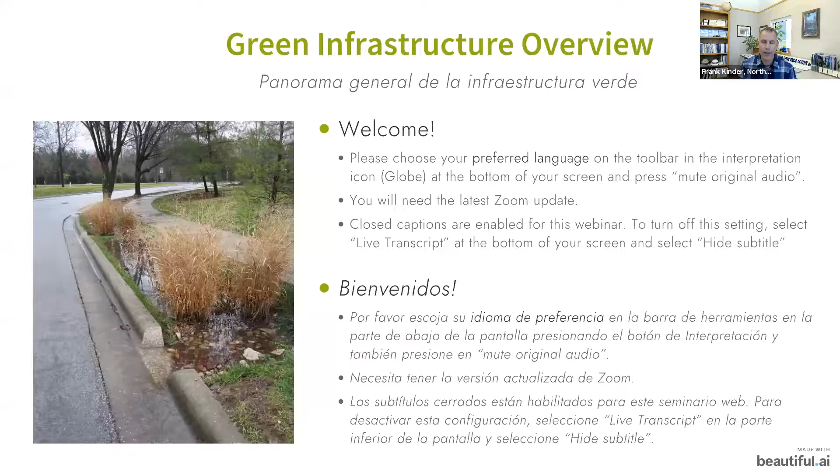Some of that water is shipped over to the eastern slope here, stored in large reservoirs known as Horsetooth and Pinewood and Carter and Boulder, and then delivered to all of these cities. As we receive precipitation on the eastern slope, we seek to manage that so that we can get good quality and deliver that water downstream.

As the supplemental water provider in the region, we have an obligation to help people understand and appreciate the scarcity of water and then what it takes to deliver it, as well as how to take care of it and to treat it with respect. And we're doing that with you today here.

The other thing we do is work with these communities who have stormwater management to transition some of the high water use landscapes in detention basins into lower water use landscapes while retaining their existing performance. So that basin that you see there on the right is using Kentucky bluegrass. It's irrigated and it's taken care of through mowing and chemical treatments. It's possible that this could be transitioned into a native turf, which would still perform the same quality requirements at the end of the day with a little bit less input from natural resources.

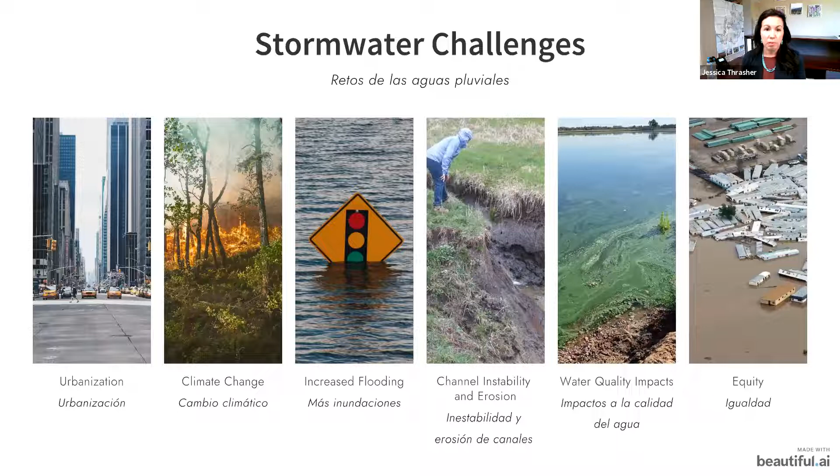To start, let's discuss the stormwater challenges we're seeing in our environment. The first is urbanization. With urbanization, we see the removal of green space. As our cities expand, we are paving over areas that were previously vegetated, and because of that we're getting decreased infiltration, which results in increases in stormwater runoff.

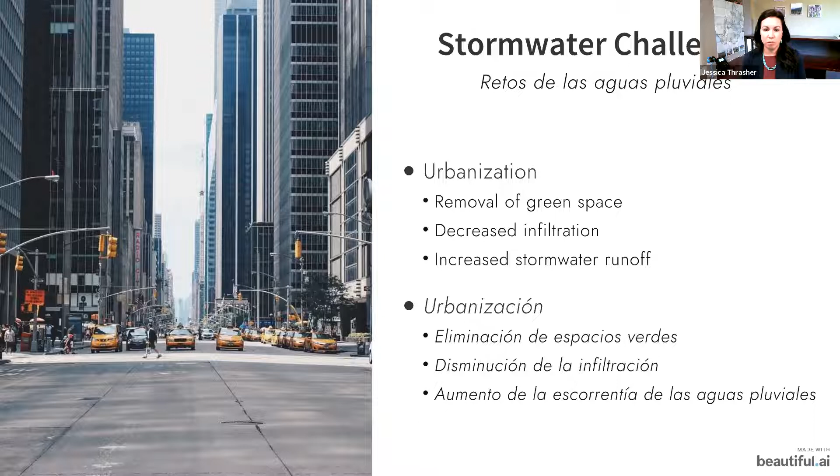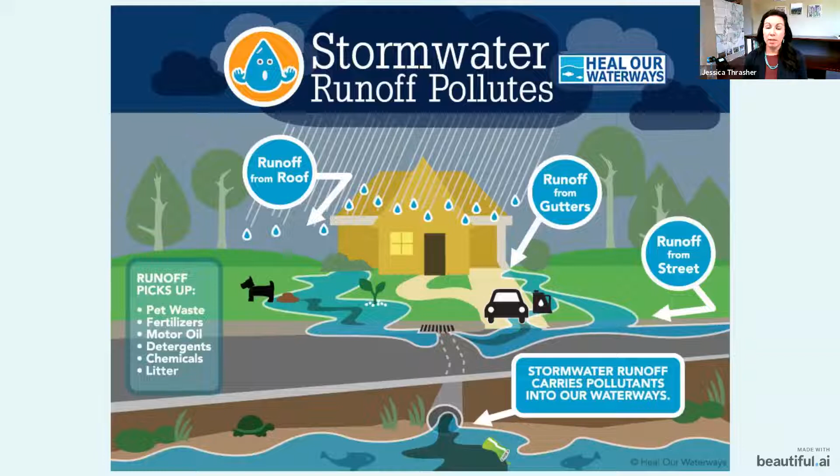We need to address stormwater partly because of the pollutants it picks up. As rain hits your roof and runs down into downspouts, across pavements, driveways, and parking lots, it picks up pet waste. Fertilizer is a huge issue as people fertilize their lawns. Frank mentioned a way we can decrease that need for fertilization by transitioning to native grasses. Motor oil is also picked up in stormwater, along with detergents and chemicals, and all of this is deposited into our waterways unless it is first cleaned by a stormwater control measure.

In addition to urbanization, we also have climate change as one of the challenges with stormwater. With our droughts, we're seeing drought as more of the norm instead of the exception. This impacts our forests, because our forests are drier. And when we have fires like we saw last year, it's a hotter wildfire and it lasts a lot longer, because the trees aren't able to withstand the normal fires they had previously.

There are a lot of impacts on water quality with fires. If you want detailed information about this, I encourage you to check out the Stormwater Symposium. When a wildfire burns extremely hot, it makes the soils hydrophobic. They're no longer able to accept that runoff or moisture. So when the snow melts, that water runs off of those soils in burn areas, picking up sediment and debris, and deposits it into our rivers.

This becomes a major issue on a lot of different levels, but just at the municipal level, Northern Water has been doing a lot of work on this. If there's a certain amount of sediment and pollutants in the rivers, it's very difficult for water providers to remove those sediments because it creates difficulties in their system. So the city of Greeley actually had to let water flow down the Poudre River this year and not remove it, because it had too much contaminants from those burn areas. This is a substantial impact on our water.

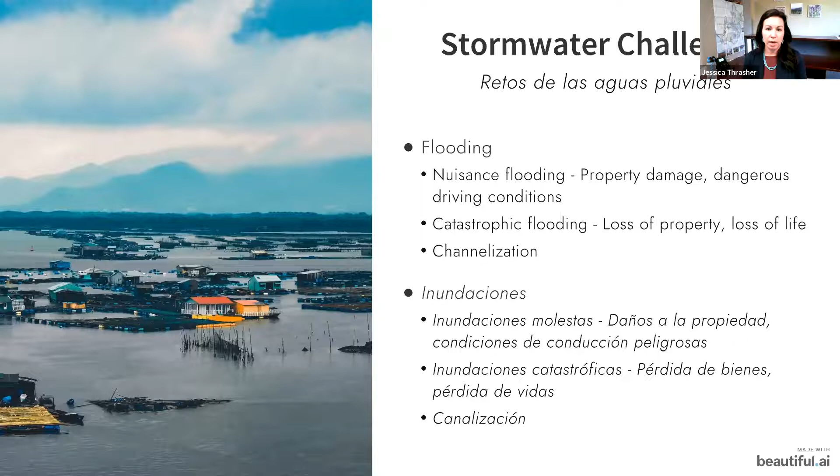Channel instability and erosion is an issue because as stormwater flows across a vegetated surface, that water infiltrates into the vegetation. When it does that, the pollutants in the water are removed and trapped in that soil profile, and as that water goes down into the groundwater, it is cleaner. When you have channelization and water cuts a path through that vegetation, those contaminants are released into the water once again, and you have the additional component of sediment also being added to the water.

When we have fertilizer and other contaminants reach our reservoirs and bodies of water, we have the potential for algal blooms, which cause hazards to human, pet, and aquatic health.

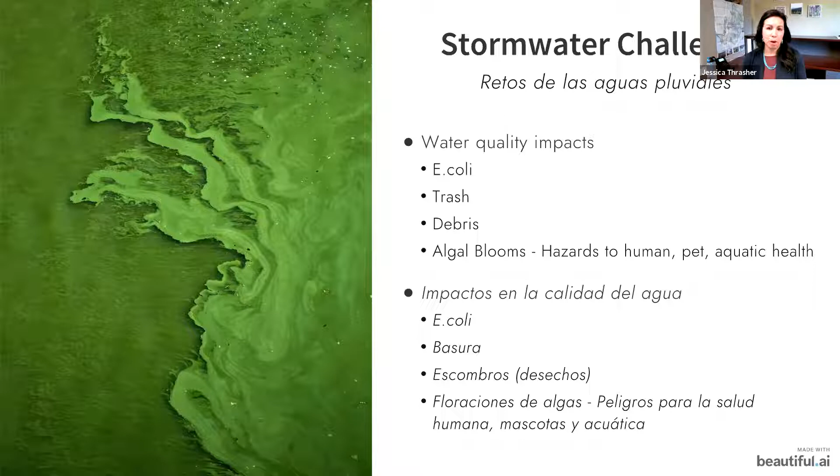And finally, along with the stormwater challenges, as we have these climatic changes, with increases in drought and increases in flooding, those challenges are impacting our vulnerable populations the most. So one of the challenges we're seeing right now is around equity. As we make adjustments to our stormwater infrastructure moving forward, we need to ensure that vulnerable populations, especially in low-income areas, are brought into the conversation so that we can have sustainable infrastructure moving forward.

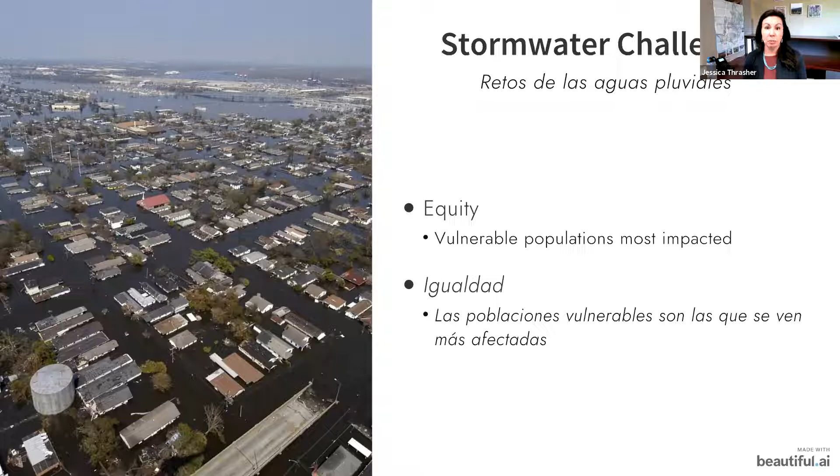Okay, now I'm going to start talking about the different types of stormwater control measures. Extended detention basins are only part of one of the different types. So we'll go into what those different types are and then focus in on extended detention basins.

The Mile High Flood District, which was previously the Urban Drainage and Flood Control District, created this 4-step process for stormwater management. Step 1 is to reduce runoff, which can be achieved by LID, low impact development, or MDCIA, minimizing directly connected impervious area. Directly connected impervious area is when your roof connects to an aluminum or steel downspout, to your concrete sidewalk or driveway, to your concrete curb and gutter system, to your concrete or metal piping—where nothing is able to infiltrate. So by reducing the directly connected impervious area, you're allowing more opportunities for that water to infiltrate. That's step 1.

Step 2 is to treat and slowly release the water quality capture volume, or WQCV. Number 3 is source controls. For example, fertilizers are hard to remove once they're causing algae growth in bodies of water, so sometimes the best approach is educating homeowners to stop using so much fertilizer, because it's hard to remove once it's in the water. We're not going to talk about step 4, which is stabilizing the stream channel, but that is another step for stormwater management.

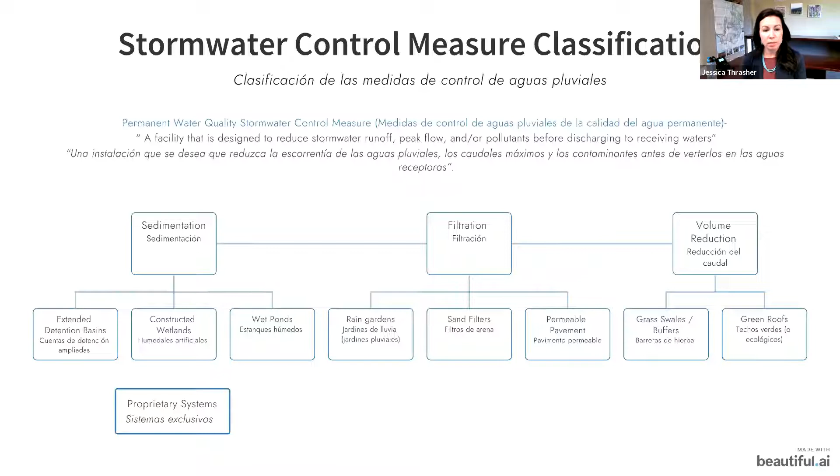There are three different classifications that we talk about with stormwater control measures. The first is sedimentation, which includes extended detention basins, constructed wetlands, and wet ponds. The next classification is filtration stormwater control measures, which include rain gardens, sand filters, and permeable pavement. The final classification is volume reduction, which includes grass swales, grass buffers, or green roofs. Proprietary systems are underground systems, and they're their own special classification.

So we're not talking about naturally occurring wetlands here. Those cannot or should not be used for stormwater management—that's a very bad idea. These constructed wetlands, also you cannot use mitigation wetlands as stormwater control measures for the same reasons. So constructed wetlands are a specific type of stormwater control measure used for that purpose, but they have the additional benefit of providing many of the same benefits as a natural wetland.

And similar to constructed wetlands, wet ponds and retention ponds are also a sedimentation SCM example.

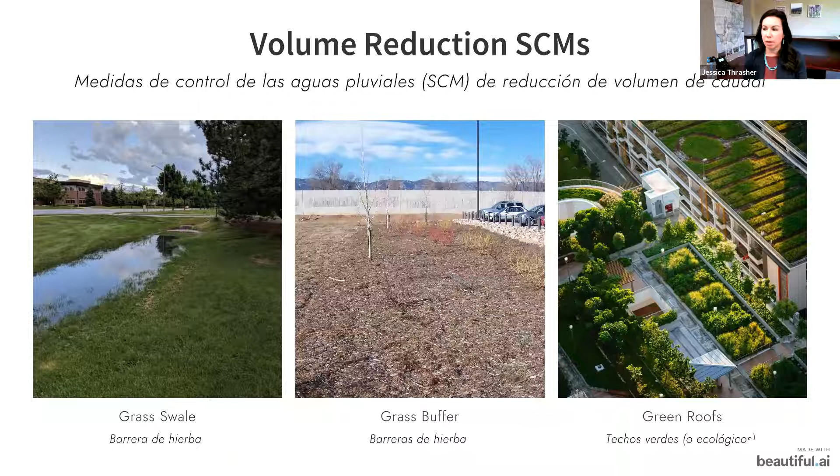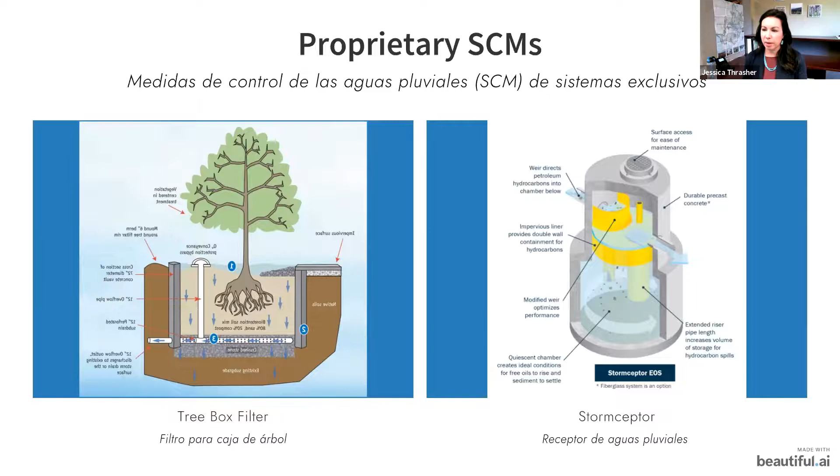Stormwater control measures are required by the Clean Water Act, especially for municipal separate storm sewer systems, or MS4 permits. When those are issued, they're regulated by the Colorado Department of Public Health and Environment, or CDPHE. As part of this permit, you are required to maintain the stormwater control measures to ensure long-term sustainability or operability of them. There are audits conducted by the CDPHE or EPA to ensure they are being maintained and operating correctly.

Why is maintenance needed? Maintenance is needed on stormwater control measures because they are designed to capture and slowly release stormwater. As that happens, particulates are dropping out of the water—that's their function. And when that happens, if you don't clean them out regularly, then they're contributing to more pollution downstream. If you have a clogged outlet structure, which we'll be talking about in a lot of detail later, they can result in standing water because the water cannot get out through the outlet, or water bypassing the stormwater control measure and being released inappropriately.

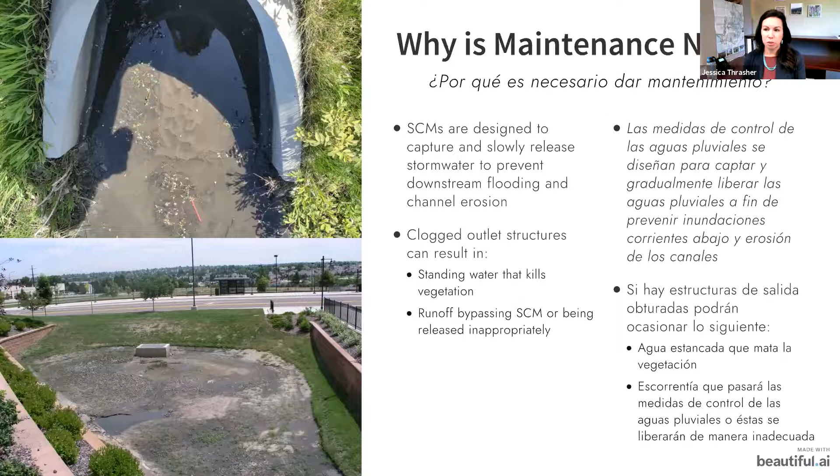As I was saying, they're designed to remove trash, debris, and pollutants from the water. And if they are not maintained, then they add more pollutants than they remove. That is not the goal of stormwater control measures.

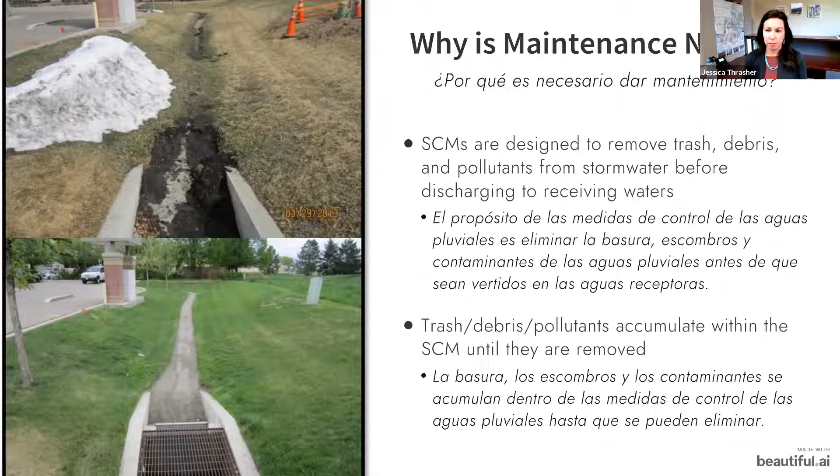As you can see here, this one has not been maintained correctly. The water that comes in is relatively clean, but the water that goes out is dirtier than it was when it entered the stormwater control measure. It's not performing as it should because it's clogged. Especially if these stormwater control measures are in HOA areas or areas that benefit the community, this becomes unsightly and unattractive, and it's not something people want to be around.

Stormwater control measures are not being maintained, usually because it's believed to be too expensive. The owners don't know that they're responsible for the maintenance, or they don't know that they actually have this stormwater control measure on their property. They don't know it's theirs and that they are responsible for that maintenance and inspection.

Potentially it's because the inspections aren't frequent enough, even if the owners do know that they own it and that they are required to maintain it. The inspections just happen at irregular intervals, and they don't know how to or what needs to be maintained because of that. There are some older designs that made maintenance very difficult.

In those cases, the maintenance isn't being done because it's very expensive to go in there and maintain it. And finally, the maintenance personnel are not sure how to perform the maintenance or what the extended detention basin needs in order to be performed correctly. So that's why they're not being maintained at that level.

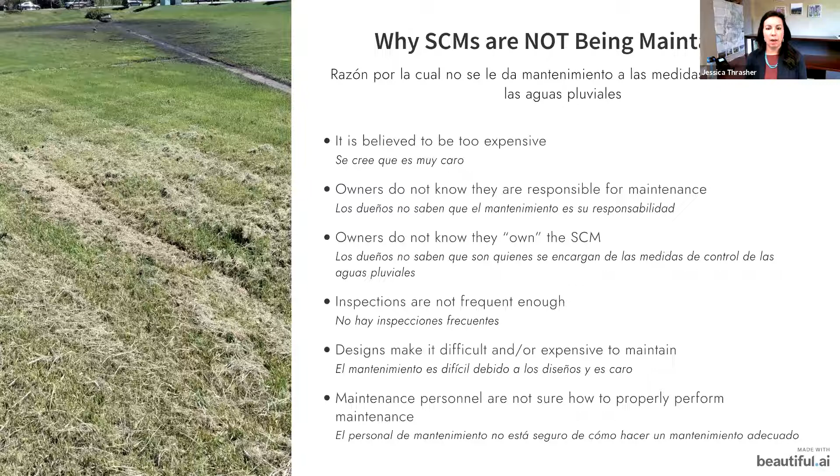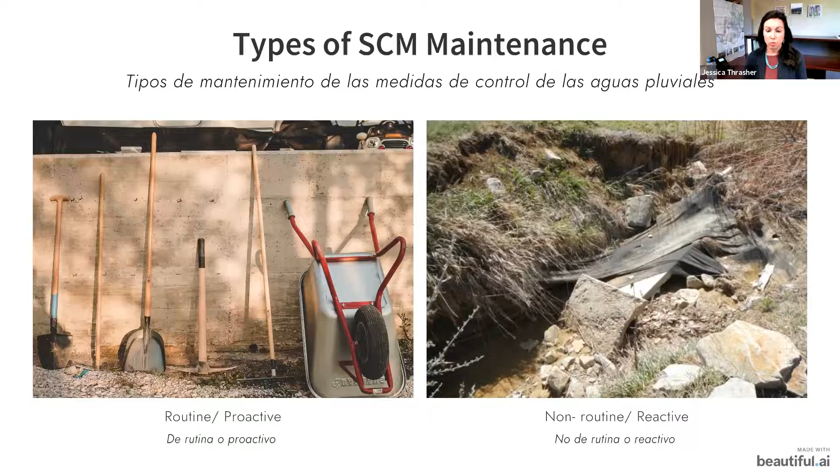There are two different types of maintenance: one is routine or proactive maintenance, the other is non-routine or reactive maintenance. Routine maintenance is the result of frequent inspections. You don't need specialized maintenance personnel or equipment.

In some cases, for the SCM or stormwater control measure, you might just need a shovel to clean out the inlet or the outlet. But in some cases, if it's a very large stormwater control measure, you might need a different type of equipment, like a skid steer, to clean that out. But you don't need specialized expertise hired to come in and maintain them. Finally, routine maintenance is the lowest cost. Non-routine maintenance is the most expensive.

In this picture here, this was at an HOA, and the HOA was not aware that they needed to maintain this property, or it was too expensive to maintain originally, or they thought it was too expensive to maintain, which led to them not maintaining it at all. This is actually a trickle channel, and I'll show you an example of that in a few minutes. But this trickle channel collapsed, and it cost them $25,000 to fix it.

In this type of situation, when it starts to look like this, you have complaints, there are potentially flooding issues, and it requires major rehabilitation. You have to hire engineering and construction expertise in order to bring in that concrete and have it regraded. So it's very expensive, and you don't want to get to this point.

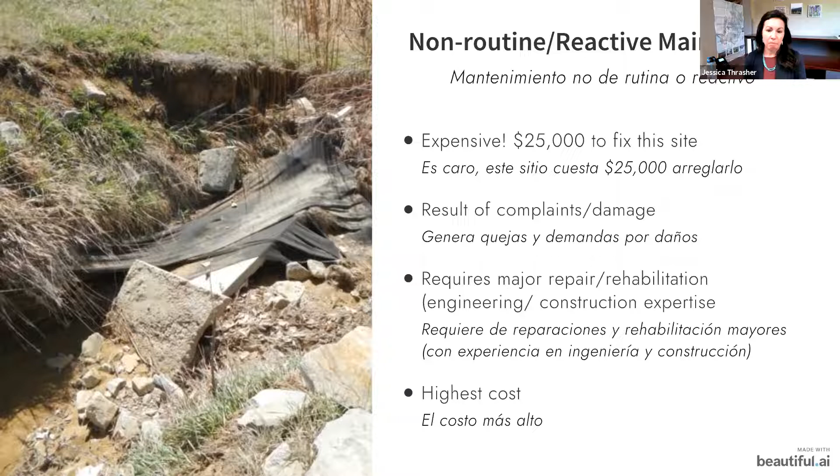Usually there are different owners, which could be private businesses or HOAs, and in some cases the city or county does own them, but they prefer for there to be other owners. The owner then needs to be reaching out and speaking with the inspection company, which could be the city or county, or it could be private contractors, and the maintenance personnel, which again could be city or county personnel or private contractors. Ideally, the inspection company and maintenance company will be speaking to each other, but if they are not, it's the owner's responsibility to ensure that conversation is happening and that the maintenance is being done correctly.

For the owner of the SCM, they need to be budgeting for the proper inspection and maintenance. They definitely need to keep all documentation of the inspection and maintenance on site, and maintain a written maintenance plan as well, because the MS4 permit holder, when they do their audits, that is what they will be checking for.

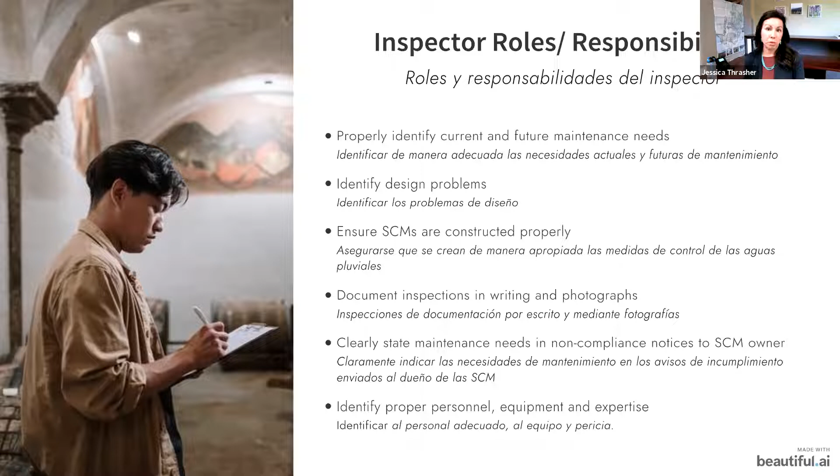The maintenance personnel need to follow the stormwater control measure maintenance plans sent to them by the owner. They also need to look beyond the inspector's list to see if anything else needs to be done while they're there, and consider potential design modifications that would make their job easier or less expensive for the owner.

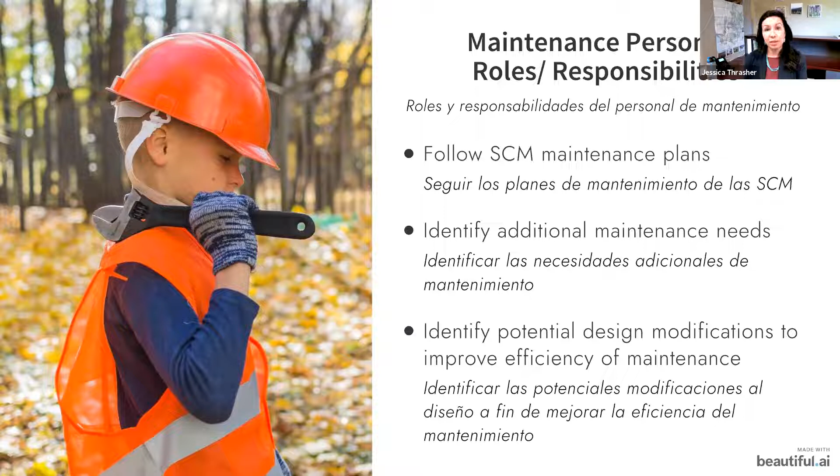Landscape contractors also play a great role in this. They are on site and potentially see the stormwater control measures multiple times during summer, fall, and winter months. So look for stormwater control measures at the sites you visit. You can be a point of education for owners, letting them know they're responsible for inspection and maintenance of their stormwater control measure. You could even offer services to inspect and maintain these as inspectors and maintenance personnel for privately owned stormwater control measures. We have a certification course for inspecting and maintaining, which is one way to add to the services you offer your clients.

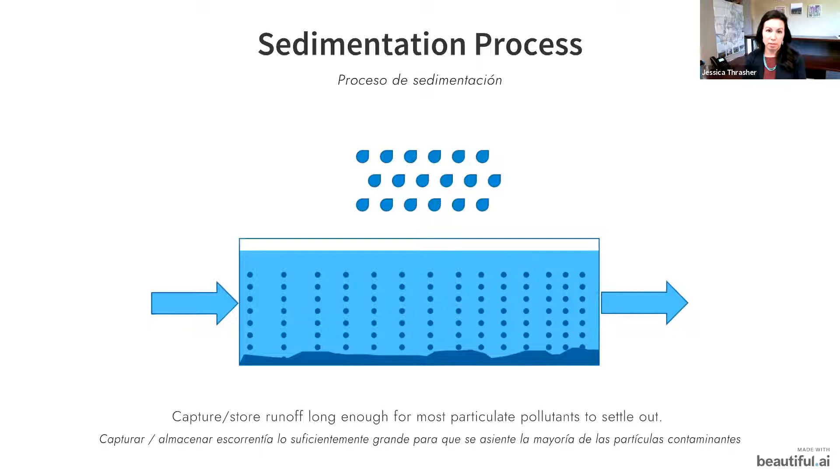Water comes into the extended detention basin, and the process holds water for a period of time so particulates and pollutants can settle out. As water comes in, the water level goes up because the outlet controls the speed at which water exits the basin. The particulates are left on the bottom of the extended detention basin. That is the process of sedimentation.

Earlier, I mentioned the water quality capture volume, also called the WQCV. The EPA defines this as the amount of stormwater runoff from any given storm that should be captured and treated in order to remove a majority of the stormwater pollutants on an average annual basis.

So what that means in reality is that the water quality capture volume is designed to treat storm runoff 80% of the time. The water quality capture volume looks at the area surrounding the extended detention basin, and it's a calculation used to determine how big the extended detention basin needs to be based on how much water will be flowing to that stormwater control measure.

The way that extended detention basin is designed is really only to hold 80% of storms. The reason why it's only 80% is because it was found that that is the most economic way to create the EDB, because a higher percentage doesn't really add that much value as far as the water quality capture volume and removal of pollutants, but it adds a substantial cost. So when civil engineers were evaluating how big these need to be, that is what was agreed upon: 80% of the storms.

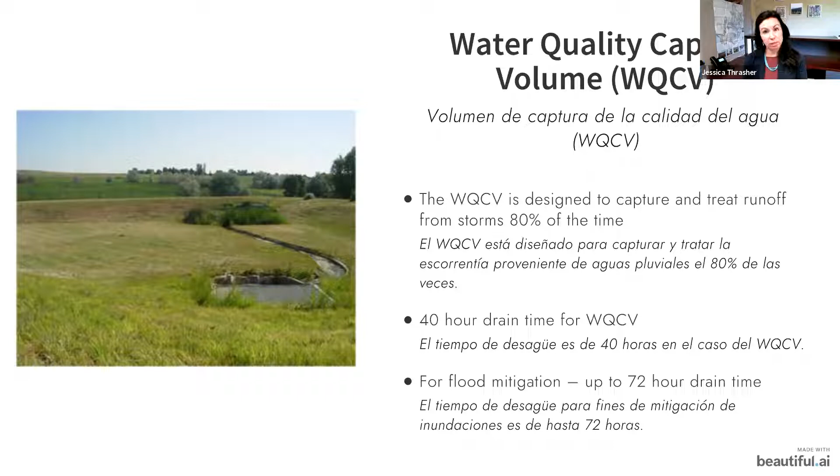By Colorado water law, water cannot remain in one of the stormwater control measures for longer than 72 hours. So sometimes you'll just see the water quality capture volume, and that's the size of the stormwater control measure, and sometimes it's also designed for flood control.

Here are the different components of the EDB: we have the inlet where water comes in, the forebay, the trickle channel, potentially a micro pool, and the outlet.

Inlets - here are a couple of different examples of what inlets can look like. There really isn't one type of inlet that you will see. It varies from EDB to EDB depending on how big the area being treated is, what sorts of pollutants are in the surrounding area, what issues they have with trash and debris, and how much sediment is accumulating. It's really dependent on the site, so EDBs are difficult - you can't just say here's what all inlets will look like, because that's just not the case.

Here's a couple of different examples of what some inlets look like. They might have a forebay with them, which we'll be talking about next. The second picture shows an inlet that doesn't have a forebay, but has a trickle channel next to it. The third picture has two inlets side by side, and this last inlet is a very small inlet going to a small extended detention basin with no trickle channel.

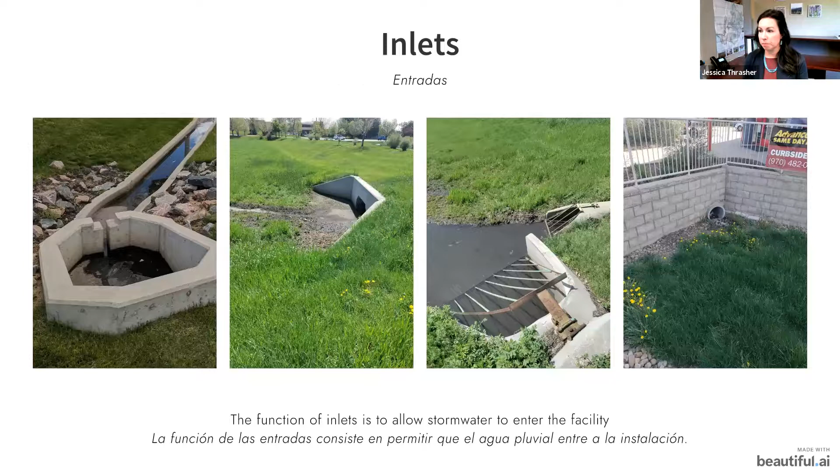So you need to remove any of that large woody vegetation that you're seeing, and remove it as early as possible - don't wait till it becomes a tree in order to remove it, cut it when it is small. You also need to remove any trash that's accumulated in your inlet or around it. As I mentioned before, the EDBs are supposed to collect trash because they're removing those contaminants from the water before the cleaner water exits into the storm drain. So trash will get into them, and that means they're working correctly, but as part of your maintenance, you need to remove that trash.

On the last photo on the right, you can see sediment has been accumulating. This is another type of inlet, basically just a curb cut into this extended detention basin from a parking lot. Because the sediment has been building up and hasn't been maintained long enough, the water can no longer get in because grass has grown across that inlet, so water can't get into the extended detention basin. When checking your inlets, remember the main function is to allow water in, so you need to do what's needed to ensure water can enter the facility.

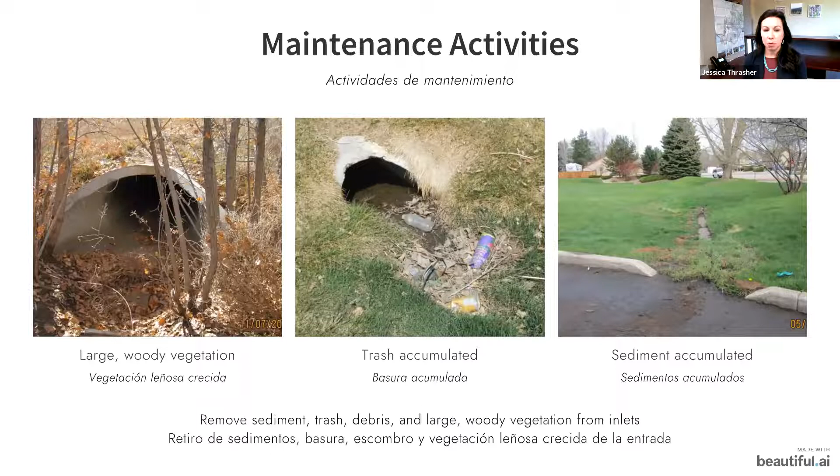Here are some examples of a clogged inlet. One of our coworkers was checking out this inlet and saw it was clogged upstream. Not knowing why, they went downstream and saw the picture on the right. What had happened here is this had not been maintained for so long that it had trash, debris, sediment, and grass growing in there. So the colleague told the owner of this extended detention basin that all of this needs to be maintained and removed, because flooding is occurring upstream, and this is causing issues for water quality.

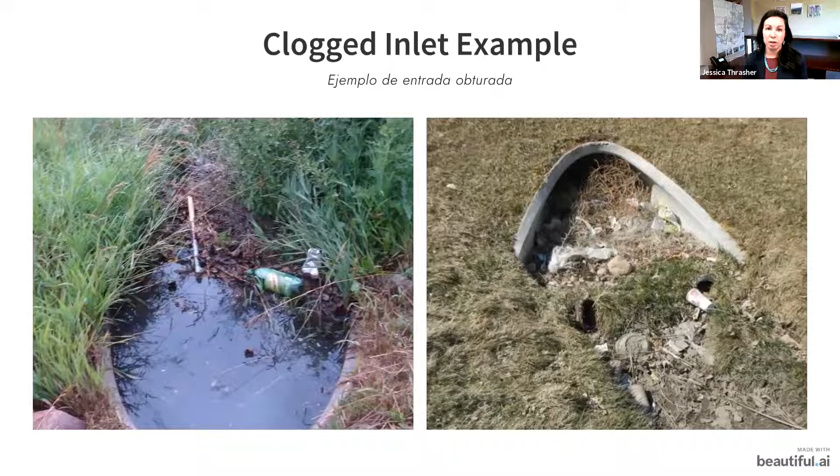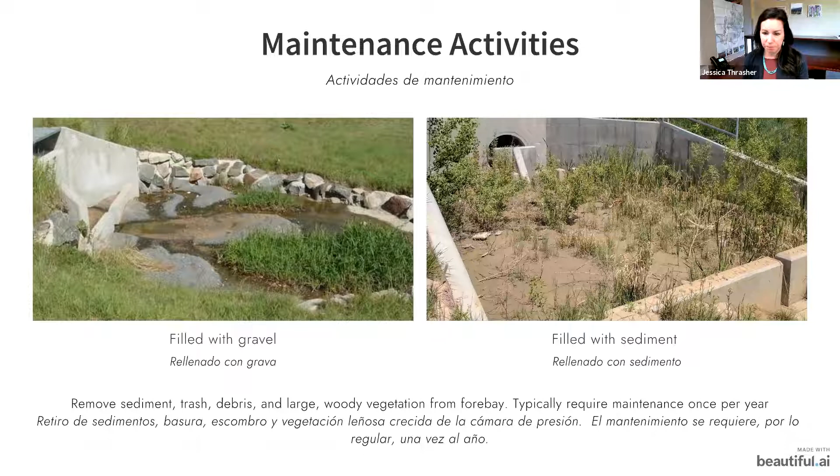One of the questions that we get is, how do you know when it's time to maintain your forebay? When do you go and clean it out? Again, usually annually, but if you see ice buildup in your forebay, then it's usually a sign of sediment accumulation and that you need to clean it out because it's ponding in there, and that's because of the accumulated sediment.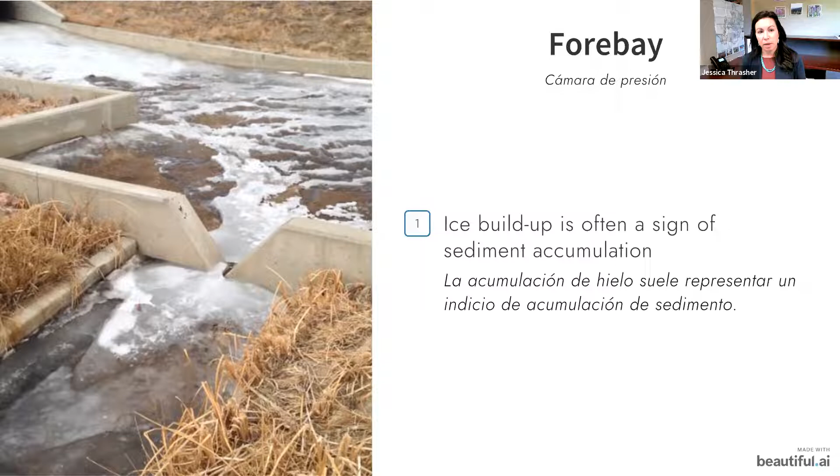Another way that you can tell that you need to clean out your forebay is if there is sediment on the outside of your forebay wall, like here, and that means the water is pushing the sediment up and out, and that is an indication that you need to clean it.

Here's another example of a forebay in Denver. This is a forebay for a rain garden, another type of stormwater control measure, and when they were creating it, they wanted to make sure their forebay was easy to maintain. So they created this drive-through forebay. This functions for the majority of the month as an additional parking spot—right here, additional parking spaces for this park.

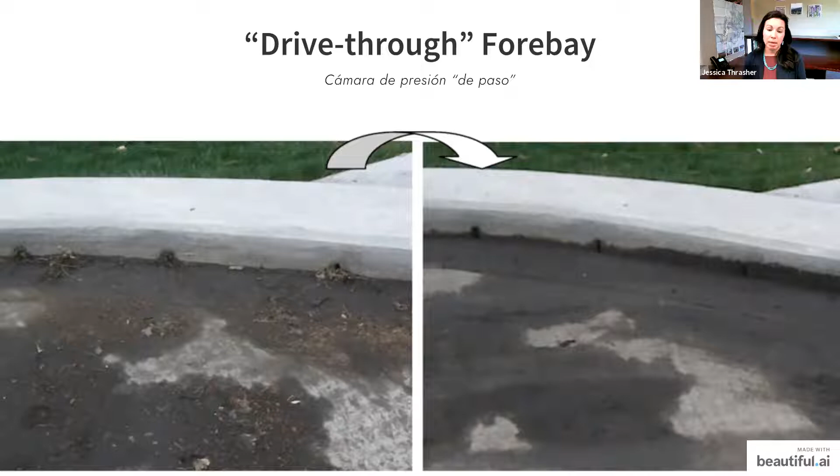Here's another example of a forebay that was connected to a retention pond, and this forebay was not working well. Over here is the forebay, but it's a wet forebay—you can have water in a forebay, it doesn't have to be dry. It just really depends on what was constructed for that site. The forebay was trying to remove trash and debris, because once it gets into the retention pond, it's very difficult to get out. They have to get in a boat, and it's very time consuming to scoop all the trash out of the retention pond.

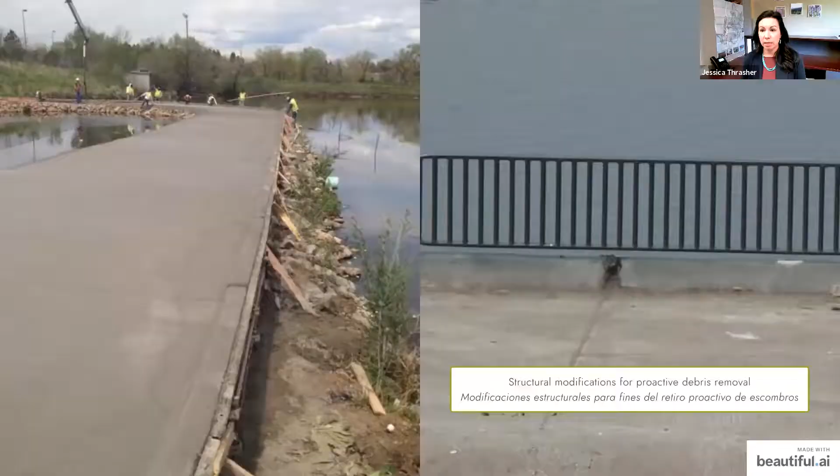This is an aqua golf facility where people hit golf balls into this retention pond that then disintegrate. It was definitely in their best interest to make sure their forebay was capturing this debris. They had tried to put up a fence around it, but it failed, as you can see, so they were having a lot of issues. They decided to concrete this driveway area and put up this fence next to it. They did all of these modifications to facilitate maintenance, to make it easier to trap the trash and debris, and not have to get into that boat and collect it with a net like before.

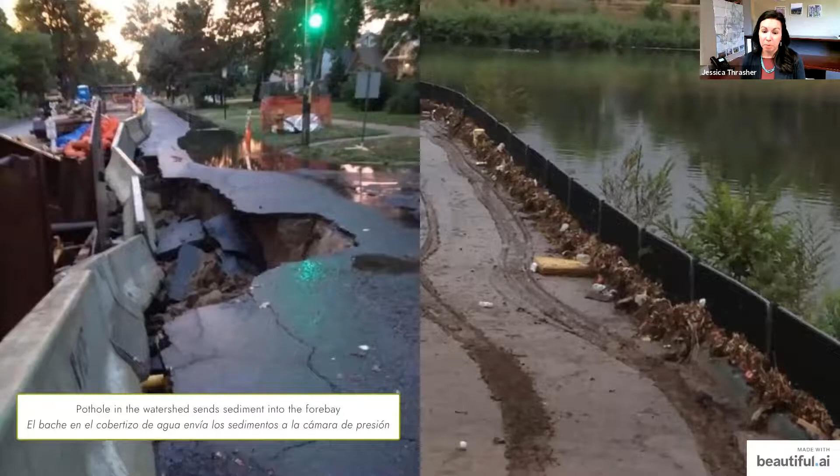What happened was there was a pothole higher up in the watershed that sent a ton of sediment into this forebay. Because they had made these modifications, they were able to stop the majority of the sediment from getting into their retention pond, saving them a lot of time and money. It was much easier to remove the sediment after the modification—they just came in with the vac truck and sucked up all of that sediment, and also had a shovel there to help. This change really helped them in the long run, and it continues to be a functioning facility.

If all of that had gone into the retention pond, they would have had to dredge out the bottom of that retention pond to remove all of that sediment, which would have been extremely expensive. So in some cases, it is much cheaper to make those modifications to your forebay to ensure that the rest of your facility will be cleaner.

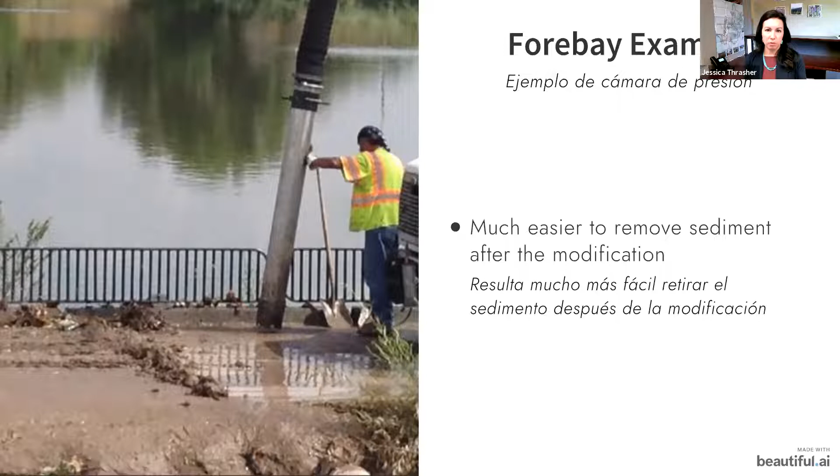Next, we have the trickle channel, which conveys small flows of water through the facility to facilitate maintenance. If you don't have a trickle channel, the water just goes to the very bottom of the EDB, creating a soggy, swampy area that makes it very difficult to mow.

The whole idea of the trickle channel is to have this area for minor storm events, so it quickly takes water from the inlet to the outlet without getting the rest of the EDB saturated. You need to remove sediment, debris, and large woody vegetation from the trickle channel, and check for erosion. There are a couple of different types of trickle channels.

On the far left picture, this is a curbed trickle channel, as you can see here why it would be called that. These can be tricky because if your vegetation or soil isn't at the right level to the very top of that curb, you can get a step down from the bottom of your vegetation or soil profile to the curb. Then all of the water runs along the side of the trickle channel instead of into it, which undermines the whole facility, and you have to regrade the EDB to make sure the soil is at the very top of that trickle channel curbing.

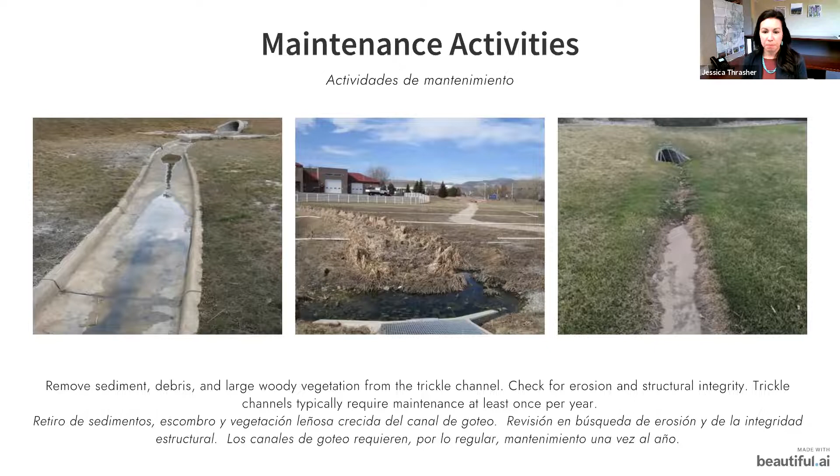The other type you'll see next, but in the middle picture this trickle channel was not maintained. They did not remove the vegetation, so you can't even see where it goes. In the third picture, they need to do a lot of cutting since vegetation has overtopped the trickle channel, and all of that needs to be cut back so water can move quickly from inlet to outlet again. Here's a picture of before a trickle channel was maintained, with a lot of sediment and vegetation coming together. You can see why regular maintenance is needed, or else the trickle channels could disappear altogether.

On the right, you have the maintained trickle channel, and this is a V-type trickle channel, so there's no curbing, just a V, and water can flow more easily into these. They tend to work easier, and you don't have to worry about water flowing on the side instead of into the trickle channel. But you still need to make sure the soil level is up to the correct height, even in the V trickle channels.

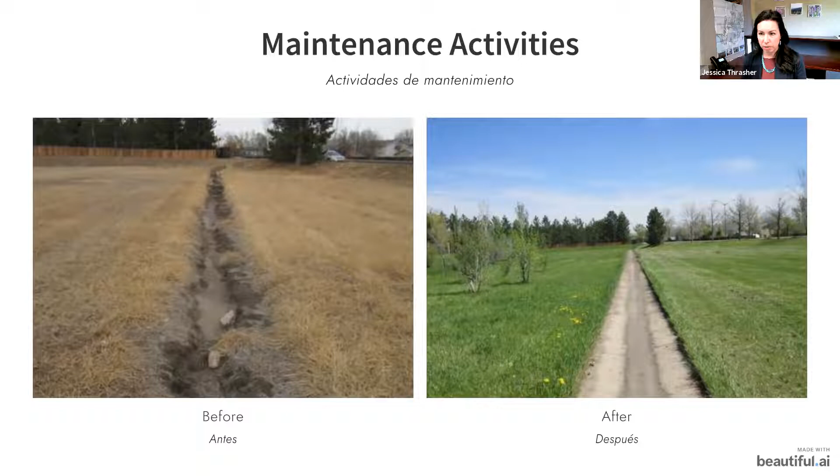Here's another example of a trickle channel that they waited too long to maintain. In this particular instance, they had to go back to the designs to find out where the trickle channel was, then cut back all of that vegetation so they could find it once again.

You might see some trickle channels that have riprap, which is what this large rock is called. These are very difficult to maintain. Imagine water coming in from the inlet and flowing through this trickle channel carrying sediment; the only way to get the sediment out is to remove all of the rock, clean it, clean out the trickle channel, and then put the rock back. Same as with forebays, when you're trying to make maintenance easier, this is actually just making it more difficult to maintain your extended detention basin. So this is not a good example of a trickle channel, and concrete trickle channels are much easier.

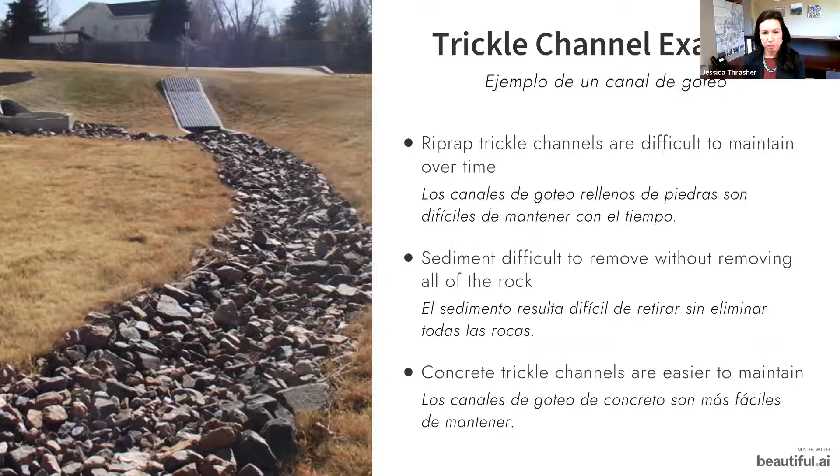In this case, they waited too long, like in the pictures we had before, to maintain their trickle channel, so the vegetation overtopped it and they didn't know where it was located. So this particular owner, instead of finding the drawings and uncovering the trickle channel, just made a new one.

This is not what you need to do if you cannot find your trickle channel. This caused the owner to fail their inspection. This is really harming our watershed instead of helping it, which is what stormwater control measures are meant to do. They had to hire an expert to come fill in the trickle channel they just made and create the new one. They had 30 or 60 days to do that because of how much they were polluting the watershed by doing that alteration.

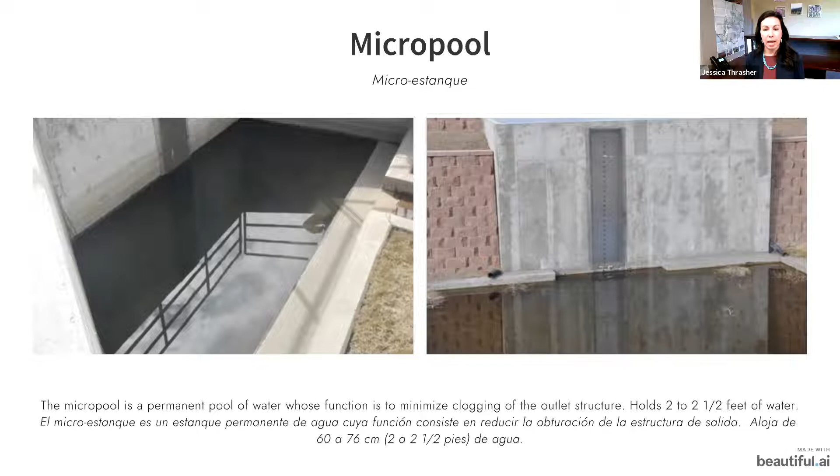The next component we have is the micropool. Not all extended detention basins will have a micropool, but it's important to know what they are and why we have them. It is a permanent pool of water whose function is to minimize clogging of the outlet structure. This is not a small amount of water - it's about 2 to 2.5 feet deep, and it's always there.

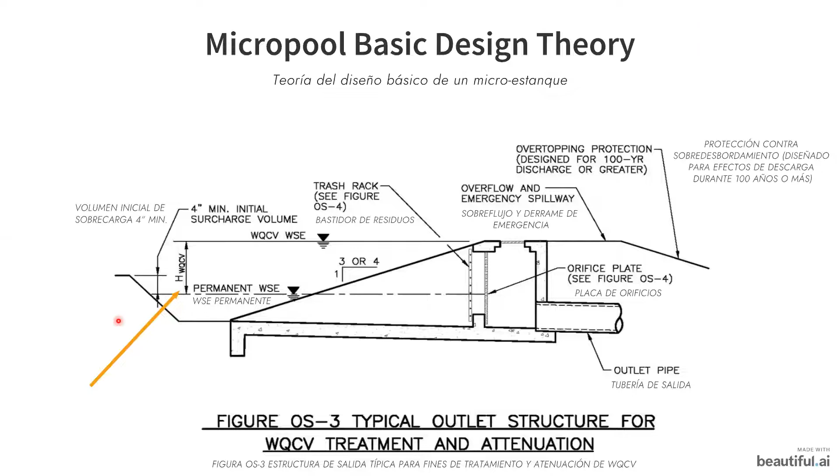Here is the side view of the micropool. So this picture here, Frank, can you see my cursor? No, we can't. Okay, well, that's not very helpful. So this line right here is the permanent water surface elevation, or the permanent level.

Now we can, thank you. This is the permanent level of water that is always in the micropool, and this is just what's always there. You have this sloped area, which is what you will see. We'll go into these different components in a minute, but just so you know, this is the level that will always be there in a micropool.

So right here, we have what I was telling you before - this is the micropool, the amount of water that's always there. The initial surcharge volume has been designed so that it sits on top of the micropool, so water sitting on top of water doesn't cause any damage. This is a really great place to put your initial surcharge volume. That's just built into the design, and it can help keep your extended detention basin looking good and functioning how it should by incorporating that.

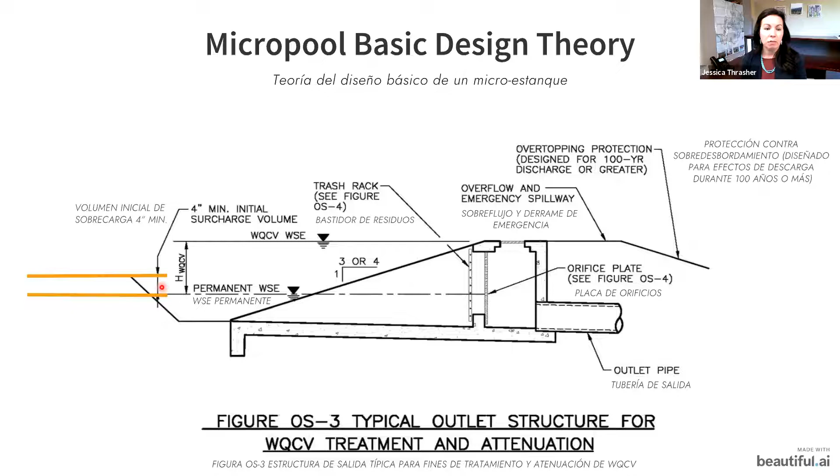You need to maintain your micropool. It doesn't need to be annually. They have a vac truck or a truck with a vacuum coming to suck up all of the accumulated sediment in this micropool. But if you have a functioning forebay and a trickle channel that you're maintaining annually, you don't have to maintain your micropool as often. But you still need to be looking to remove any sediment, trash, or debris.

You can perform mosquito and algae control, and also do a structural inspection, making sure that you don't have woody vegetation undermining your concrete structures.

What ends up happening is there's actually just a small amount of water at the very top of that sediment. Then you will have issues with mosquitoes because it's a small or shallow pool of water. But when it's functioning properly and it's a deep pool of water, you should not have any issues with mosquitoes. Now, algae is common in micropools.

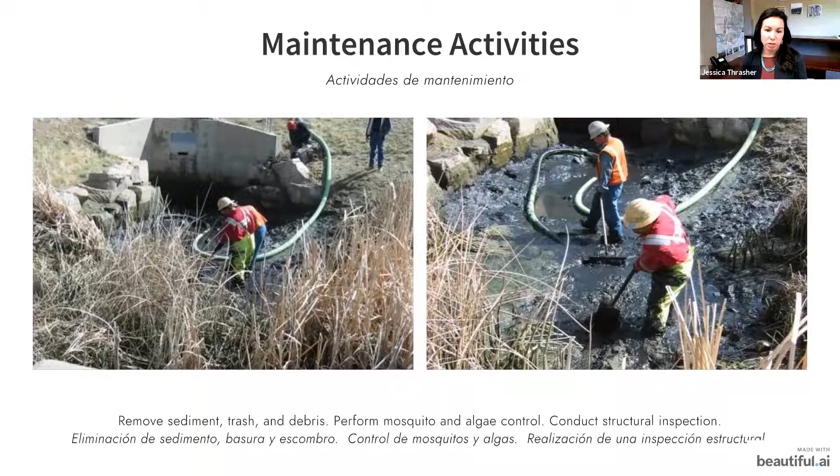Algae is good for micropools because we're not trying to create an ecosystem, we're trying to remove pollutants from the water. So the algae actually absorbs more pollutants than when you don't have algae present in a micropool. It's actually a really great function to have algae in your micropool, but it smells bad and people don't like the way it looks. So that's just for your information, kind of what typically can happen with a micropool.

Like I was mentioning, you can conduct this maintenance of a micropool every several years if you have maintained the trickle channel and you have been maintaining the forebay.

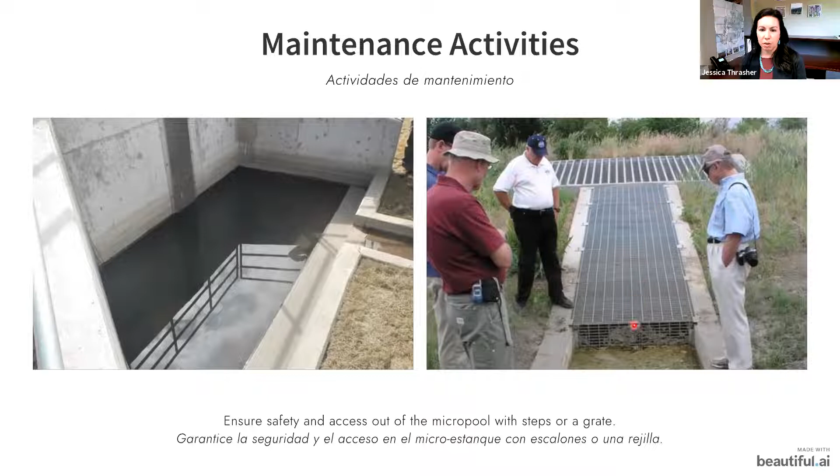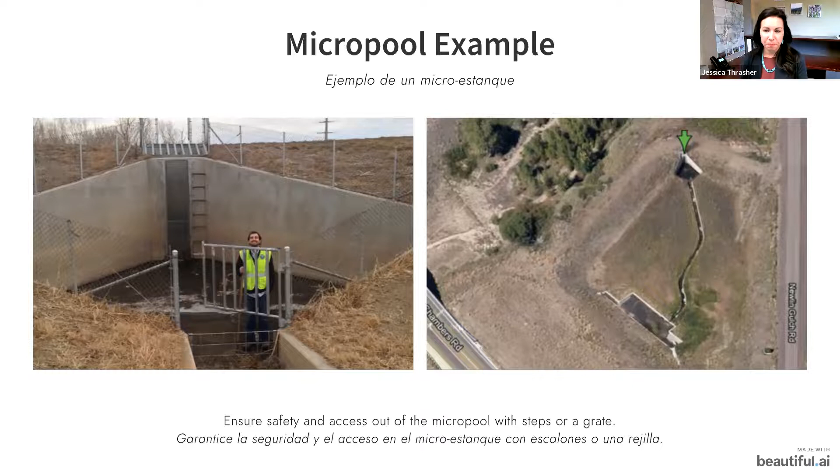Here's the inlet, the trickle channel, the micropool, and the outlet. The outlet structure is the component that controls how quickly water leaves the extended detention basin. So the outlet structure provides that pollutant removal and cleans the water by slowly releasing the treated water.

This is the component that, again, provides the primary pollutant removal. Some people think that the forebay does that because it's capturing that big debris, but that's not the part ensuring the water quality component is being done, and that's by the outlet structure.

Just like there was a safety grate over the micropool, you also need a safety grate over the top of the outlet structure.

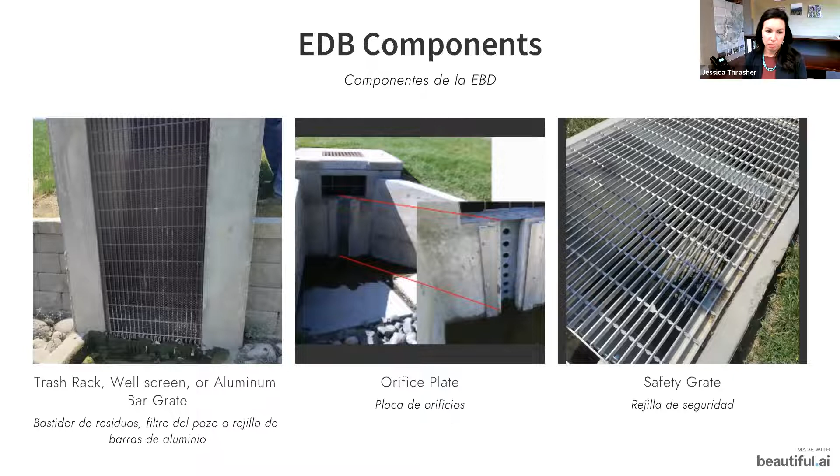The trash rack keeps the orifice plate from clogging, and the orifice plate provides the pollutant removal. So the trash rack goes right in front of the orifice plate. The trash rack holes are smaller than the orifice plate holes, because anything that gets through the trash rack needs to be able to pass through the orifice plate without clogging it. So there are smaller holes for the trash rack, but more of them, so it's not inhibiting the flow of water. It's just keeping that orifice plate clear and allowing water to flow freely through it.

When you are doing maintenance or inspection on your orifice plate, you want to make sure the orifice plate is firmly connected to the surrounding structure. You don't want to ever remove it unless you're replacing it, of course, but otherwise never remove it. Check for any gaps or modifications in it, and make sure that it's still functioning the way it should. If there are any gaps, if it's been removed, or sometimes I'll show you what people do to the orifice plate in the next slide.

If you see that it's askew or disconnected in any way, that means water is able to flow through the orifice plate more quickly than it should. So the holding time will be less than 40 hours, which is what it's supposed to be, to ensure that sedimentation process can take place. If that sedimentation process isn't taking place, then the pollutants haven't had enough time to fall to the bottom of the EDB, and they're just flowing into our storm drain without being cleaned at all. So it's very important that the orifice plate is functioning how it should.

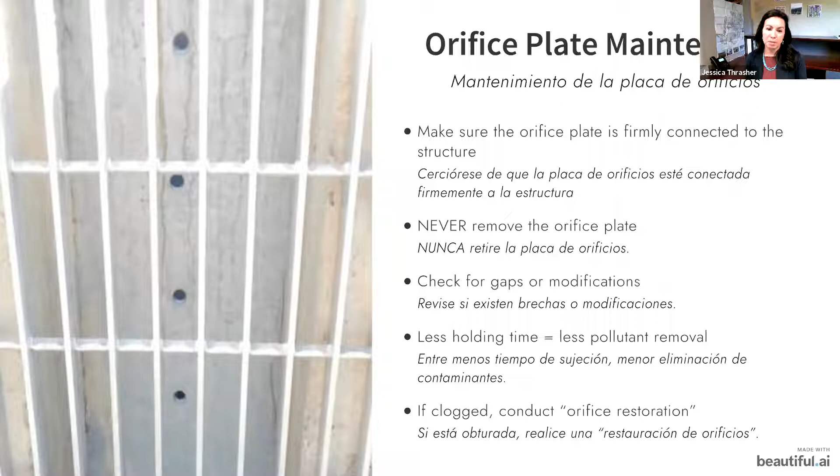So any modification to the orifice plate will most likely be very easy to spot, because it'll most likely look something like this. The reason why people do this is because they see water that's ponded.

They see water sitting in this extended detention basin and they think, oh no, something's wrong with it. I don't want water sitting there. And they try to make the water go through it quicker. So that's why they hack away at the orifice plate. And then water does exit quicker, which, as I've already said, is really bad. That is not how this should function at all.

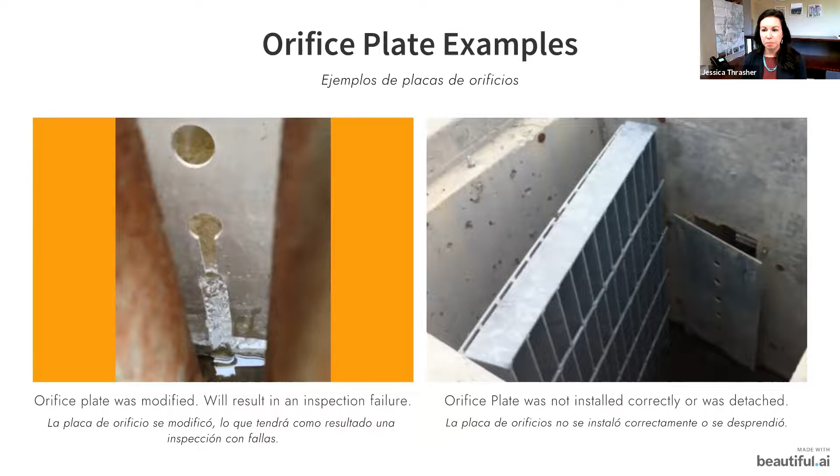Here are the trash racks that I was telling you about. The well screen has smaller holes, and you would need to use this if the orifice plate holes are less than 1 1/4 inch in diameter. The aluminum bar grate can be used if the orifice plate holes are larger than that.

In some cases, if you go out to a site and see there's a well screen with ponding issues, and the water isn't able to move quickly enough through the outlet structure, you might talk to the owner about upgrading to a larger hole size orifice plate so you can use an aluminum bar grate. With those larger holes, you'll be able to allow more water through, less will clog up that trash rack, and then you won't potentially have these ponding issues on your EDB site.

For your trash rack maintenance, whether it's aluminum, stainless steel well screen, or the bar grate, the maintenance is the same: you need to go and remove all the debris and trash from the trash rack. This might be after large storm events, or once a year - it really depends on your site. Also make sure the trash rack is present and attached correctly. If you don't have the trash rack there, then the orifice plate will be clogging, and if you have clogging with the orifice plate, you have extra holding time.

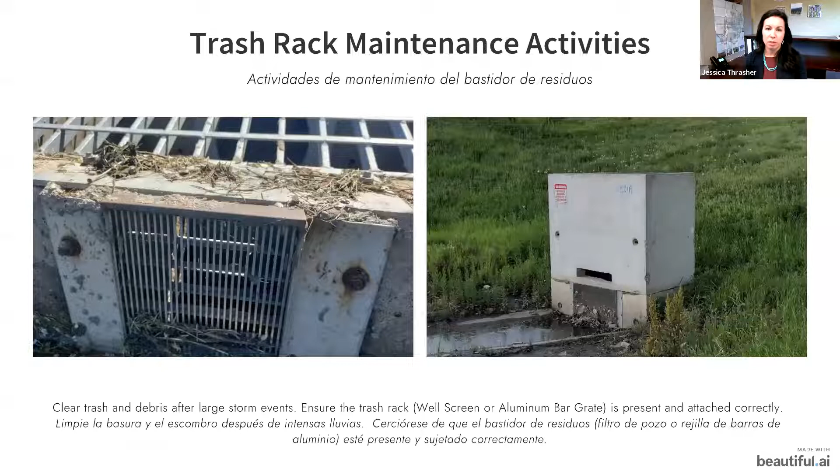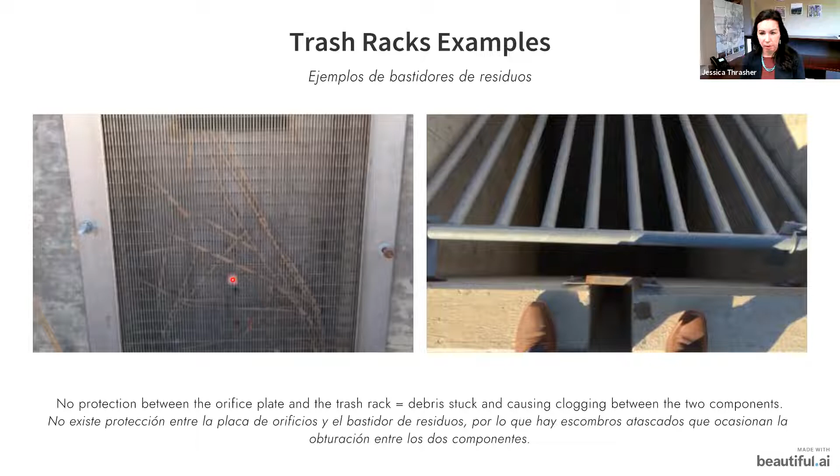So you might need to bring some new connectors and some sealant with you. Sometimes the connectors will not go back into the same spot that they were before. So you need to make sure you have all the tools with you that you need in order to replace those correctly and firmly.

Also, metal to concrete does not seal. So you need to have some sort of seal, a rubber gasket with you, or be able to bring some caulking to make sure that seals properly.

Well, because the holes were so small, they were getting clogged. So it wasn't actually a 40-hour drain time. Since that was what was happening, they determined, and Mile High Flood District was part of this, that instead of being exactly 40 hours, it needs to be about 40 hours.

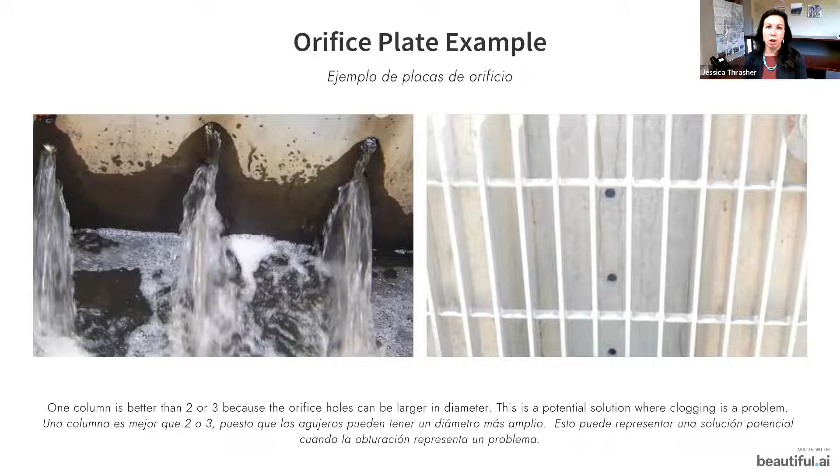This could be something you recommend to your owner, that if you go out there and see that clogging is an issue, you might recommend making the orifice holes larger. If it's an older design, you can upgrade to a single row of holes in the orifice plate and then put on a bar grate instead of the well screen.

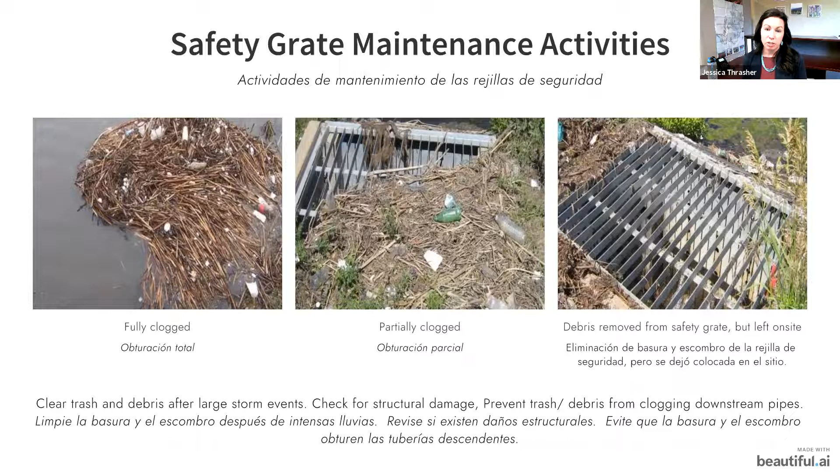So whenever you are removing debris for maintenance, you need to remove it completely. It needs to be off-site. You can't just clean out your forebay and then dump it into your extended detention basin somewhere else. That's not solving the problem, and you're just creating more maintenance tasks later on.

Safety grates are fabricated pieces of equipment. They're not something you can just make with things you have left over at your house. There's a reason for them. They need to be installed correctly. They need to be the correct size. So if you see this, please tell the owner that this is a failure of their outlet structure and that they need to replace the safety grate appropriately.

Same thing for your outlet structure, still removing that sediment. You need to do this once a year. Any debris or vegetation that has accumulated in front of it, because you don't want debris and vegetation blocking the outlet structure. The outlet is where the water needs to leave. You cannot be creating the situation where water can't get out, again, ponding issues.

So the right picture here has riprap, those large rocks, in front of the outlet structure. Riprap only needs to be where the inlet is, because the fast flowing water is coming in from the inlet. By the time the water reaches the outlet, it's no longer fast flowing, since it's having a controlled exit rate from the orifice plate. So we don't need energy dissipation at the outlet, only at the inlet.

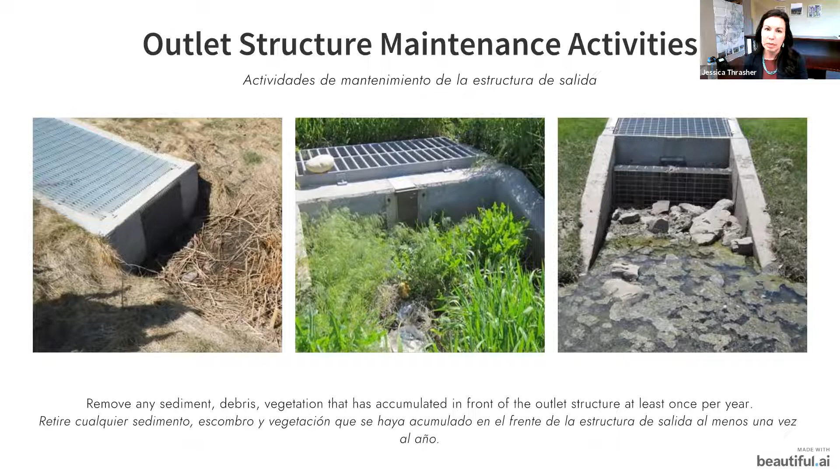In this example, this outlet structure was installed too high. The outlet structure should be at the very bottom, the lowest level of your EDB, so that water can flow in and flow out. If the outlet structure is too high, you'll just have this situation where you have constant ponded water.

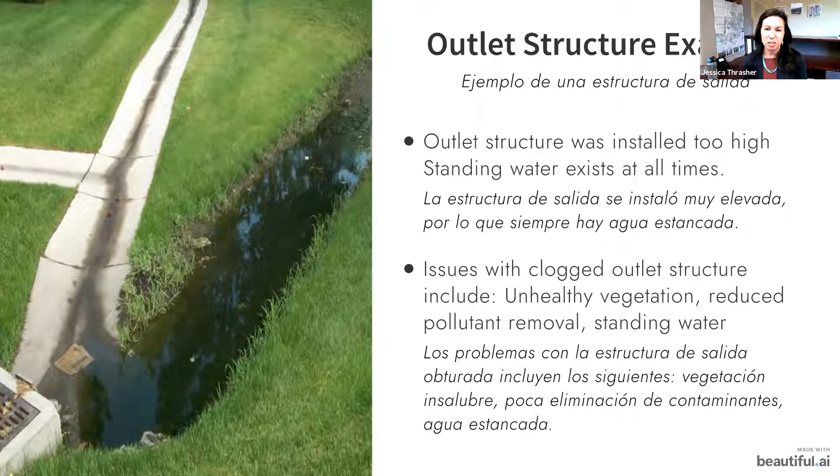When you have ponded water, you have dying vegetation, you don't have the correct amount of pollutant removal, and then you have standing water, which creates a mosquito breeding area and causes a lot of problems for the residents around this space. So in this particular case, they needed to completely regrade this extended detention basin. Sometimes they'll just wait until it fills up with sediment completely so the whole thing has failed and then redo it. But I would prefer to go ahead and fix it so you're not adding more pollutants to the water and having these issues with standing water and the problems that brings.

Vegetation. When you have vegetation in your extended detention basin, its function is to stabilize the basin from erosion and also have an aesthetic benefit. You will need to establish your vegetation in some way, so having temporary irrigation is one way to do that. This would be especially beneficial for the native grasses that Frank was mentioning earlier. Native grasses in your extended detention basin need to be watered, but once established, you will no longer need to water it, hopefully. So by having this temporary irrigation in place, you can just remove it afterwards.

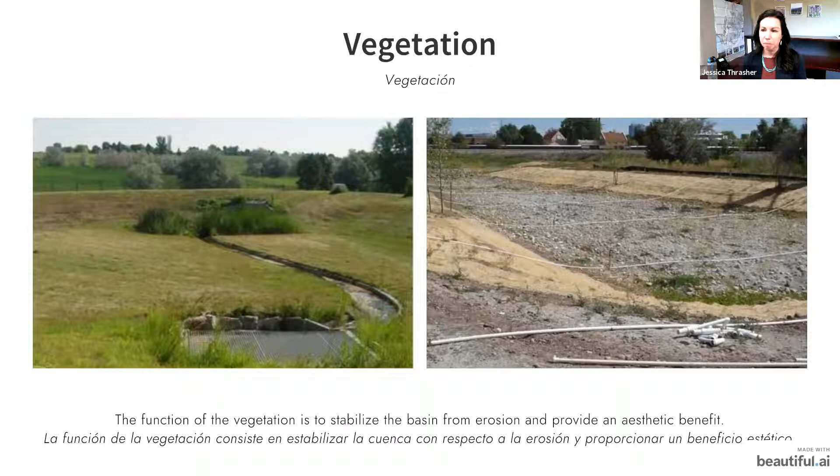What you need to do with your vegetation when checking it is make sure there's healthy vegetation, and make sure any necessary irrigation has been provided. Avoid fertilizers - I would rather just say never use fertilizers, because with stormwater control measures, we are trying to remove pollutants from the water. When you add fertilizer to an extended detention basin, it will wash into the water and be very difficult to remove, so you're adding pollutants instead of removing them. Extended detention basins, or stormwater control measures in general, should not have any fertilizers placed on them. And when you mow these areas, you have to remove the lawn clippings. I'll show you why in our examples later on.

In addition to ensuring healthy vegetation, you want to remove any woody vegetation growing up next to it. A lot of these extended detention basin areas have also become a green space for people to use. I've been asked, is it okay to have trees in your extended detention basins? It is okay - you just cannot have them next to any concrete, because that's when they start undermining it and causing issues. So as long as the tree is not next to your inlet, your outlet, your trickle channel, or any concrete at all, you can still have them as an additive feature in your extended detention basin.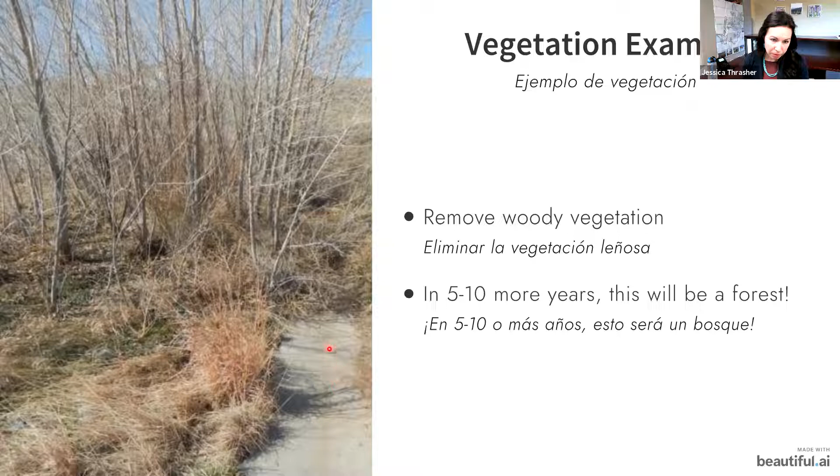The embankments and overflow area of your extended detention basin need to be stable and sloped so that you prevent erosion and safely convey water from very large storm events to the overflow area. These EDBs handle about 80% of storms, so 20% of the time they will overflow. You need to manage where that overflow goes, and ensure the overflow area is stabilized and not creating an issue downstream with more sediment or debris.

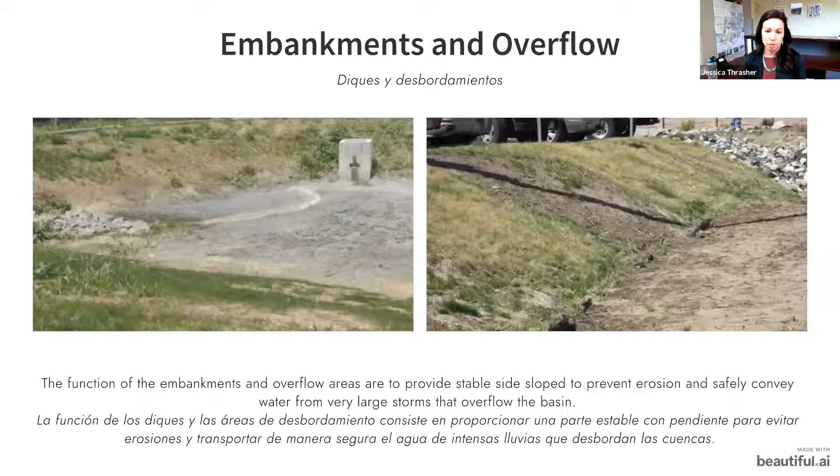When you remove debris from the forebay, the trickle channel, or the outlet structure, it needs to go to the landfill. You can't just use that material at a different project as fill. If you really want to use it as fill material, you need to get it tested first to ensure there's no toxins that could harm an adjacent or the same watershed. This is called the TCLP procedure, the toxicity characteristic leaching procedure, to determine if the fill material can be used elsewhere or must go to the landfill. Usually it's best if it just goes to the landfill. It might need to be dewatered—if too wet, it has to be dried out before going to the landfill—but otherwise it's acceptable for landfill and not considered hazardous waste.

This example looks at how you maintain these sites—is it easy for proper maintenance to get to those areas? Maintenance roads have to have stabilized access, created for the type of vehicles that will be coming to do the maintenance, with the proper load capacity. When originally constructed, it's great to have that maintenance access, but if it doesn't have the correct load capacity, you won't be able to get trucks or maintenance equipment to the site anyway. So that needs to be part of your planning, ensuring access to all these different sites.

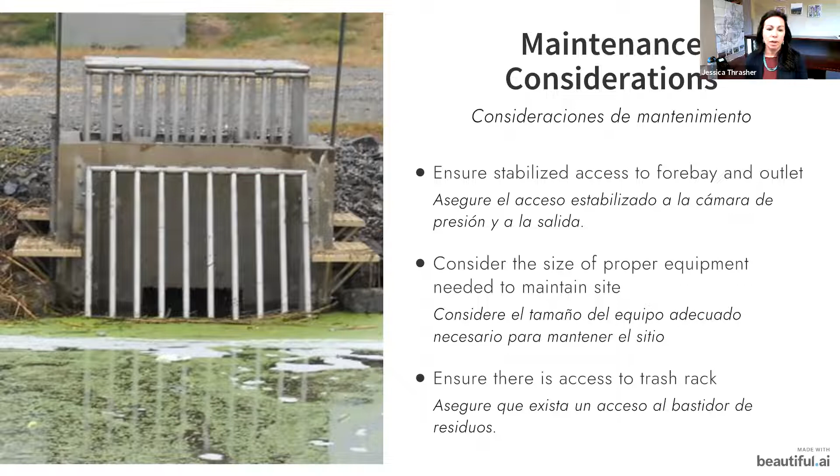In this particular example, the trash rack is right here in front. Because this was a micro pool, they wanted to be able to get to this area to scrape off the trash rack, so they put in these steps for easier access for maintenance. This was a great addition—something you can look for when inspecting a site, and a recommendation you could make for installing something to make maintenance easier.

Here is proactive versus reactive maintenance, and what it looks like when you don't have the proper components in place. The picture on the right is the same site, but here they didn't have a trickle channel, a forebay, or a micro pool. There's a little bit of a trickle channel, but because there was no forebay to remove sediment, trash, and debris before it enters the EDB, all of that went into the EDB and clogged the outlet structure, since there was no micro pool to help prevent clogging. So it just became this mess.

Because those proper components were not installed for the EDB, they had to completely redo the site. Now the vegetation looks beautiful and healthy, they have the forebay in place, they have the micro pool in place, and the site looks and performs much better.

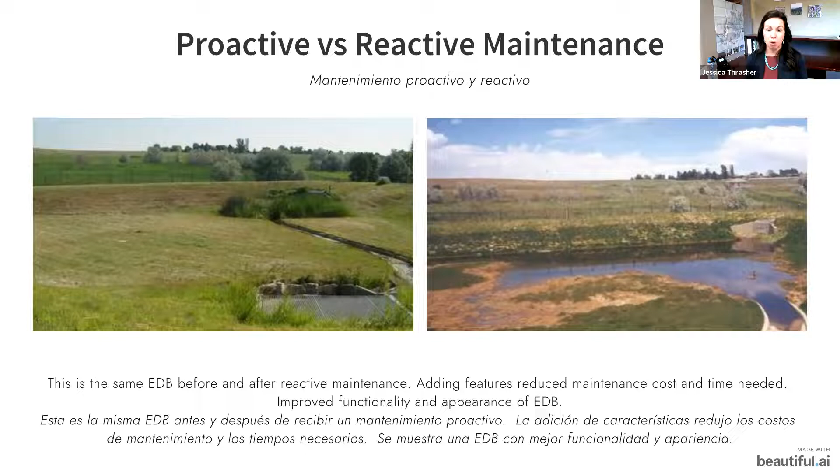Excessive ponding—we're using the same picture as before, plus an additional site we'll look at in our examples. This happens because there's no micro pool, no defined initial surcharge volume, and they weren't maintaining the site well enough, or it wasn't properly sized in the first place. So you get this excessive ponding and the killing of vegetation, this very unfortunate looking area.

You also need to make sure that the outlet structures are visible. In this case, we don't even know how big the outlet structure is because it hasn't been maintained properly, and vegetation has started to take back that outlet structure. So you need to dig it out so you can see the trash rack at all times, clear away all the vegetation, and cut back this area so you can see the full size of the outlet structure.

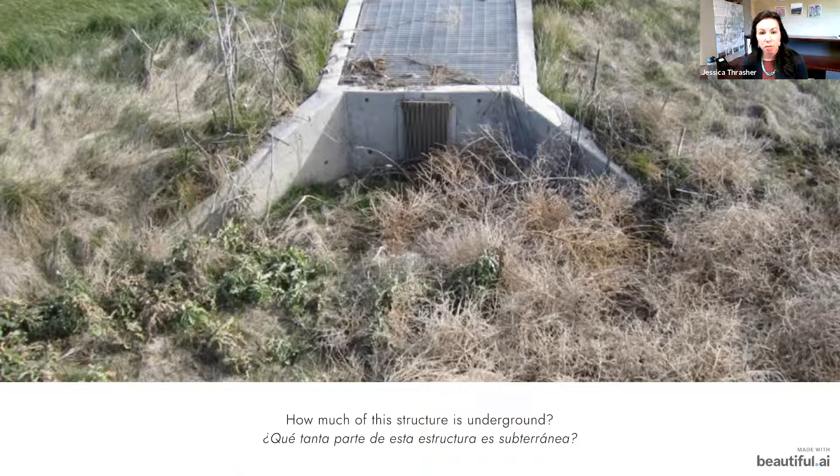In an extended detention basin, the only components you absolutely have to have are an inlet and an outlet. But what happens if you only have an inlet and outlet? So right here, here's the inlet, here's another inlet, and here's the outlet. There's no forebay, no trickle channel, no micropool, and also no defined initial surcharge volume. So what you get is a mess, essentially. Sediment accumulates through the entire extended detention basin, you have ponding issues, and vegetation that is killed, all because those components were not put in.

So if you go and inspect or maintain, or this is your site, you just need to look at how it could be redone. Look at adding those additional components to have an actually effective EDB that's working properly.

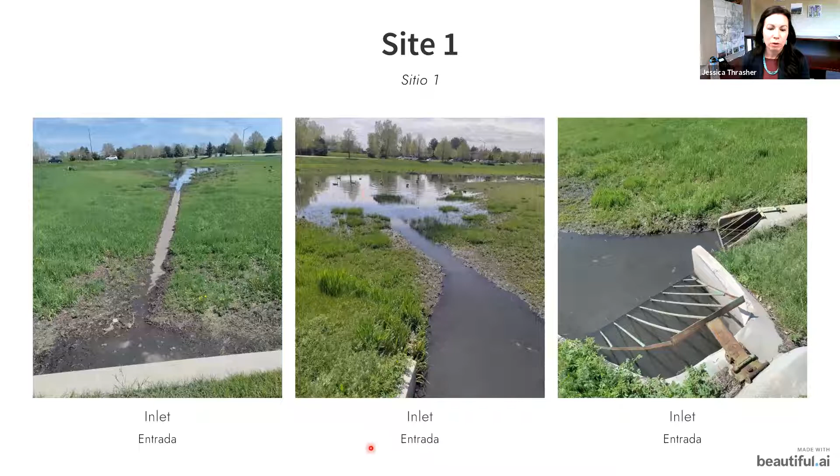This is a different inlet, the same site but with multiple inlets. The inlet right here is actually the one for way over here, and both of these pictures are from that inlet. This particular inlet has two different pipes coming from separate areas that both feed into one inlet and go into this center area. You can even see some ducks back there, and some geese, too. They were really enjoying this ponded area.

And then we start looking at the outlet. As I'm looking at this ponded area, I'm thinking this is too much water for the type of rain event we had. So what is going on? Obviously, the water is not able to get out of this EDB.

I wonder why that is. So I go closer and I start to see something blocking the outlet. I look closer and what have they constructed? It is a little fence with barbed wire, rebar and chicken wire. The reason this was probably put in place is because the owner was noticing, oh my gosh, here's my trash rack, it's a well screen and it's clogging all the time.

I wonder why that is. Since it's clogging all the time, they made a little fence around it so it doesn't clog. As you can see, that did not fix the problem. What they should have done was upgrade their orifice plate to have larger holes so they could put a well screen on there. So that's just another side of how you could see that.

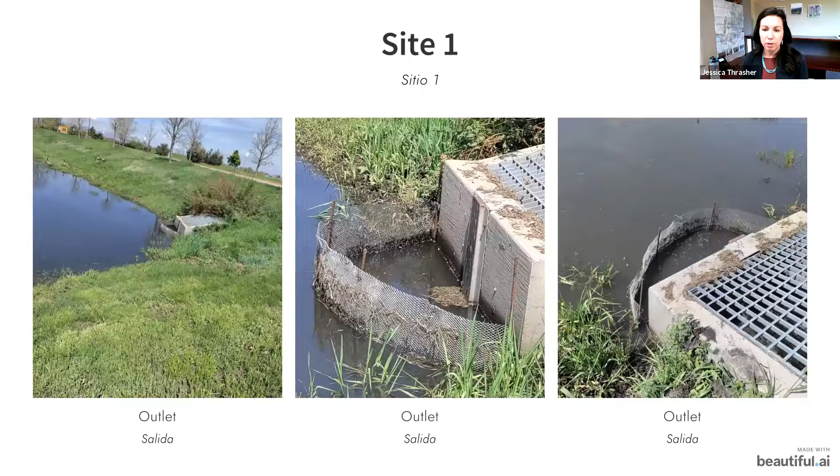And then here you can just see the extensive amount of ponding that's happening in this EDB, and a closer look at this outlet structure.

Okay, let's see what happened 72 hours after the rain event. If you remember, 72 hours after a rain event there should not be any water in the EDB, because that violates Colorado water law. So I go back and look, and oh my gosh, this whole ponded area - this picture should look familiar because I use it a lot in the presentation. Look at how much vegetation has been killed by this huge ponded area.

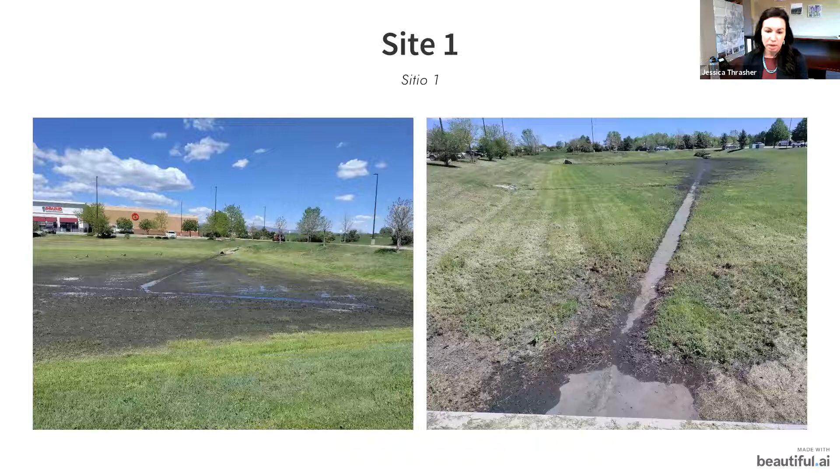You can see from one of the far inlets over here how much damage has been done by the amount of ponded water. And look at that outlet structure - it is covered in grass and completely blocked and caked. This is the reason why there's all this ponding happening, and it is this huge muddy mess, as you can see in the third slide.

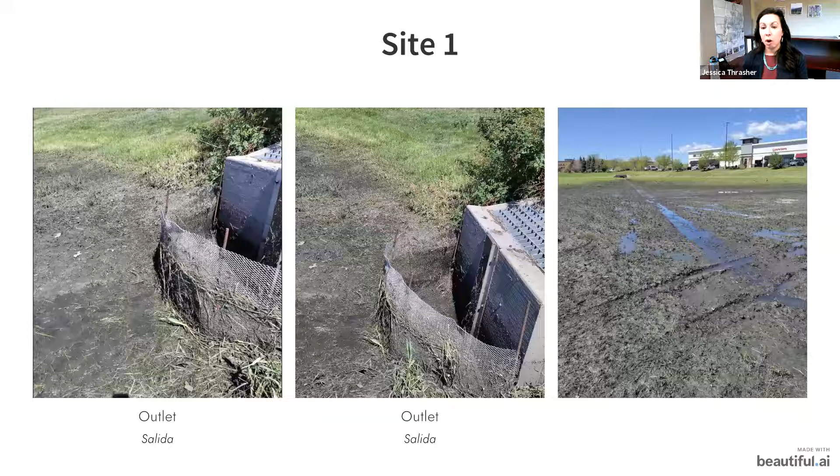So this is not an attractive EDB. There's a lot of issues with it, and it's causing more pollutants to enter the water than before.

Okay, here's a different site we're looking at. If you remember, a trickle channel is supposed to convey flows from the inlet to the outlet. Where is the inlet? There's no inlet here, so there's no purpose for a trickle channel here at all, no reason for one. That was the first thing noticed - they had an additional expense in this EDB for no reason.

I'm starting to see some water here, but it was 24 hours after a rain event, so I was just checking it out, not super concerned. Then I see there's water here - okay, it's still okay. But then I see this inlet.

This inlet has a ton of sediment in it, similar to the other site we saw. There are two inlets close together, both full of sediment. The reason they're full of sediment is because you're having ponding inside the pipe, which should be slanted so all the water flows through and doesn't stop inside the pipe. Because if water stops inside a pipe, it's performing the same function as your sedimentation basin should - water is held and then pollutants and sediment drop out.

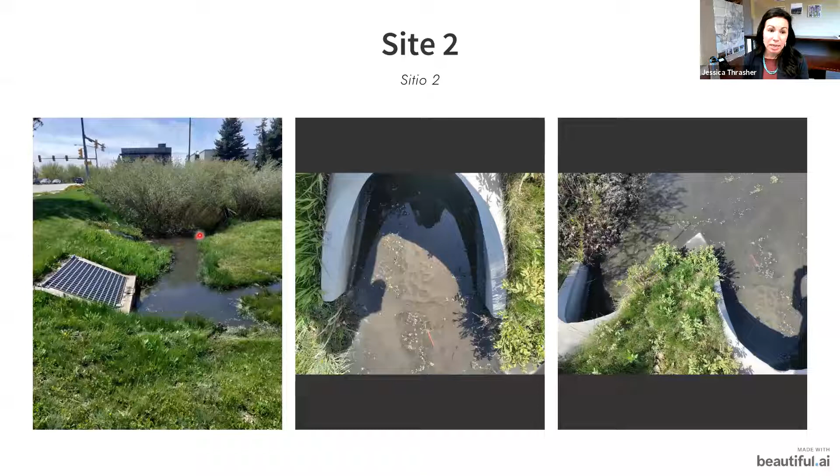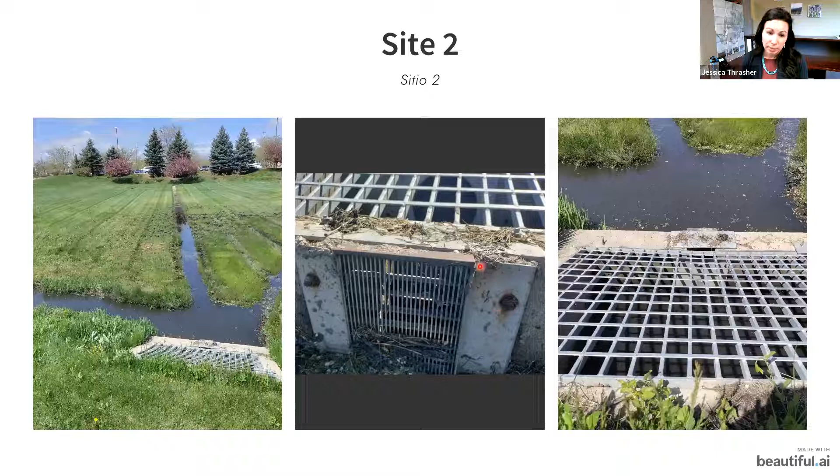So here's another viewpoint of what this EDB is doing, and it's confusing again - why was this installed this way? This would be another place where you could recommend upgrading from this well screen, or from the aluminum grate to a well screen - no, to the larger grate, the aluminum grate versus the well screen. They do have a safety rack right here, which is good, but they're still having lots of issues, lots of maintenance. We're also seeing a ton of grass right here, okay, we'll be talking about that in a minute.

72 hours after, same site. Now we see dead vegetation. We see a lot of sediment.

There is a lot of sediment that needs to be removed to maintain this site properly, and a lot of areas that can be improved.

From the arrows, this arrow is the other inlet. It is completely hidden by all of this vegetation, so that needs to be cut back, and a clear path from the inlet to the outlet needs to be there. This vegetation and all of this sediment need to be removed. And once again, upgrading this well screen to a bar grate, because obviously it's not sized properly for the amount of water coming to that outlet structure.

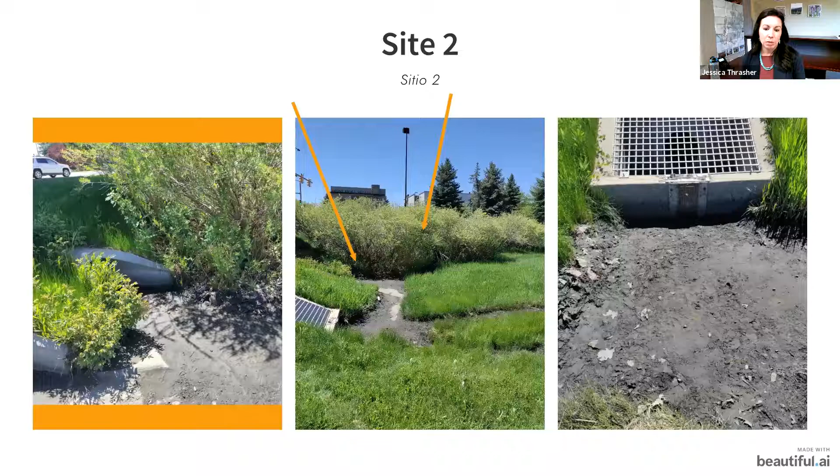Now I'd like to invite Frank back to talk about Northern Water sites and some examples from a conversion they are working on towards native grasses.

Sure thing, thank you very much, Jessica. This is a community in Fort Collins called Pelican Ridge. It's an HOA that had cool season Kentucky bluegrass for its common area along the back of the property, facing private property, and they sought to transition the cool season bluegrass into something less water intensive and more sustainable, yielding additional ecosystem services while still retaining the high quality stormwater performance requirements they had to meet.

This involved about 4¼ acres of a planned kill of the bluegrass using 2 applications of glyphosate. What they intended to do was seed it with native seed in a seeding ratio that would provide really deep, intense coverage, but after initial irrigation, lead to less water intensity.

So they performed those 2 applications, then did aeration with multiple passes, I believe 6 passes, to provide for percolation. They also did some upgrades to the irrigation system to repair inadequate coverage and use the best available technology for rotors and heads and things of that nature.